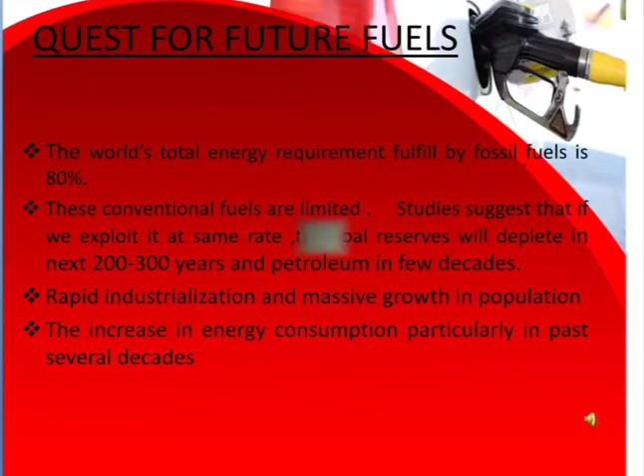Quest for future fuels means why future fuels are required. The world's total energy requirement fulfilled by fossil fuel is 80%, and studies show that if we exploit these at the same rate, they will deplete in the next 200 to 300 years, and petroleum in just a few decades. Due to rapid industrialization, massive growth in population, and increase in energy consumption, there are fears of exhausting natural resources. Solution: we should engage more in research and development of alternative fuels so that we may not face any scarcity of natural resources in the future.

Alternative fuels are materials or substances that can be used as fuel other than fossil fuel. These are also known as non-conventional fuels. Some alternatives to conventional fuels are hydrogen fuel cell, biofuel, natural gas, alcohol fuel, electricity, and other fuels.

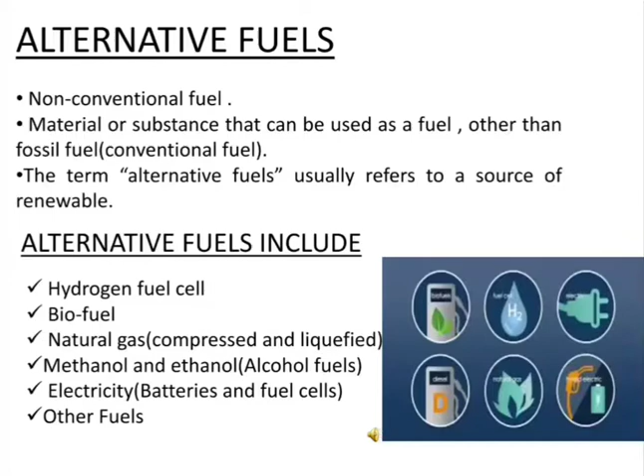Hydrogen is an emission-less fuel. The byproduct of hydrogen burning is water. It stores up to 3 times as much energy as conventional natural gas. When burned in an IC engine, nitrogen oxide and carbon monoxide are produced due to the use of engine lubricant. If we use hydrogen in a car, it would take comparatively less time to fill it up due to hydrogen fuel cell efficiency.

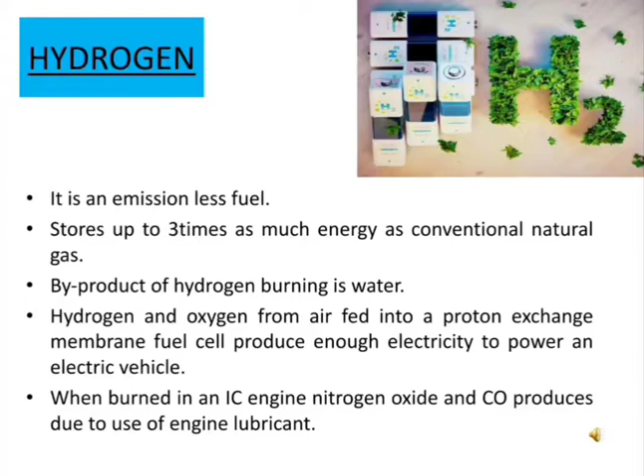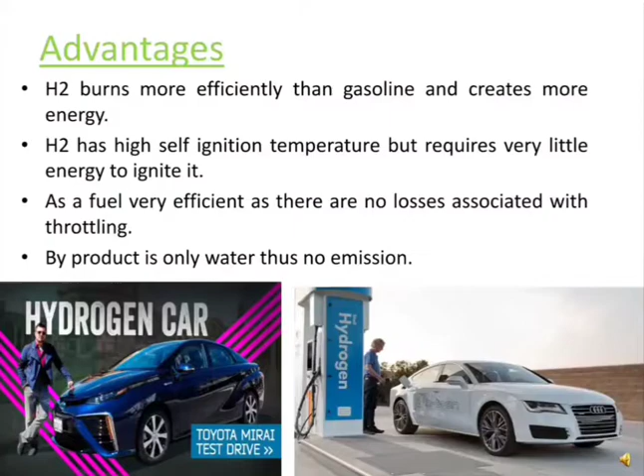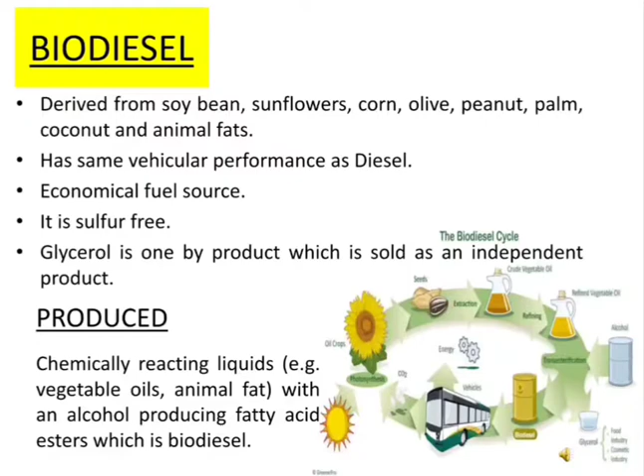Biodiesel is derived from bioproducts, for example soybean, sunflower, corn, etc. It has the same vehicular performance as diesel. It is an economical fuel source. It is free from sulfur. Glycerol is one byproduct which is sold as an independent product. This diagram represents the process of producing biodiesel.

Advantages: it is environmentally friendly. It can be used in any diesel engine with little or no modification. It helps lubricate the engine itself, decreasing engine wear and tear. It is safer than conventional diesel.

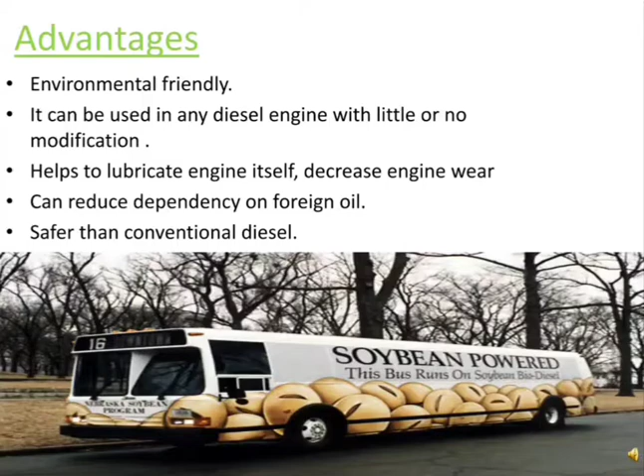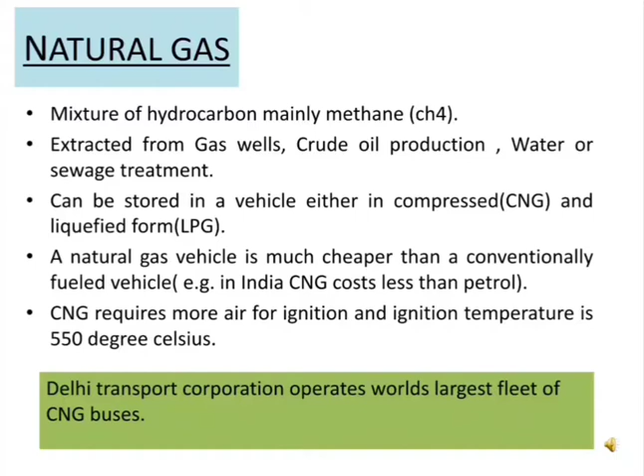Natural gas is a mixture of hydrocarbons extracted from gas wells, crude oil production, water or sewage treatment. It can be stored in a vehicle either in compressed or liquefied form. A natural gas vehicle is much cheaper than a conventionally fueled vehicle. For example, in India, CNG costs less than petrol. Delhi Transport Corporation operates the world's largest fleet of CNG buses.

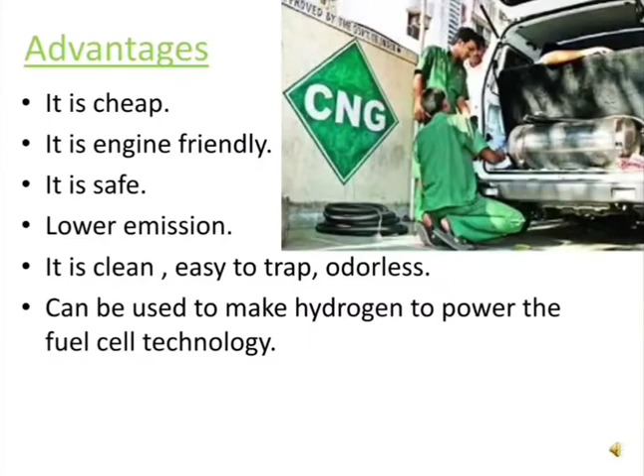Advantages: it is cheap, engine friendly, safe, lowers emissions, is clean, easy to trap, and odorless. It can be used to make hydrogen to power hydrogen fuel cell technology. These are some examples of CNG vehicles in India.

LPG is a byproduct produced when natural gas is processed and crude oil is refined. It is non-toxic, colorless and odorless. An odorant is typically added for detection purposes. LPG-run vehicles have lower emissions of reactive hydrocarbons, about 1/3 less, nitrogen oxide 20% less, and carbon monoxide 60% less than gasoline vehicles.

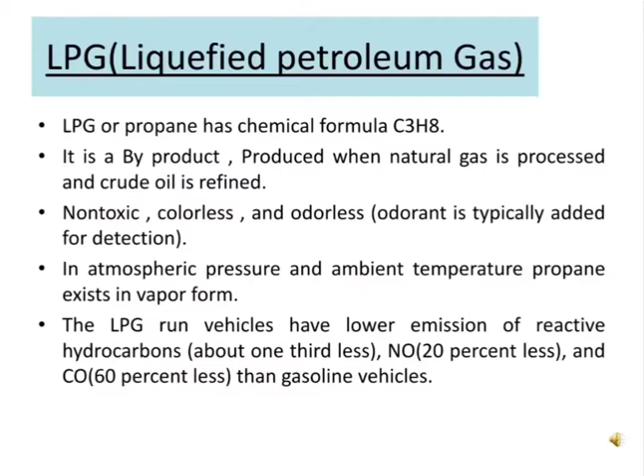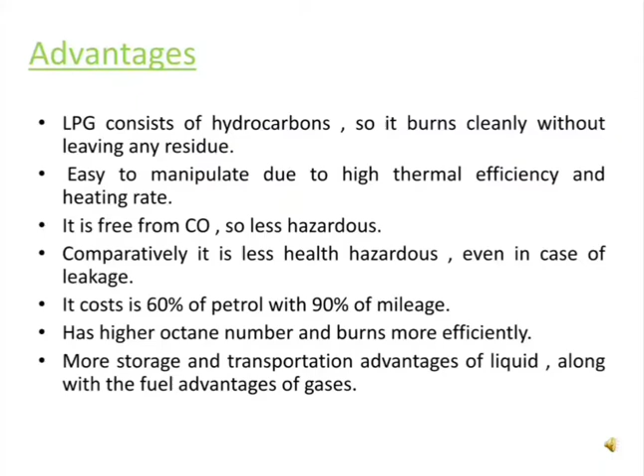Alcohol fuels: first, methanol. The primary alternative methanol fuel being used is M85, meaning 85% methanol and 15% gasoline. In the near future, M100 may be used. It is created from synthesis gas, hydrogen and carbon monoxide, in the presence of a catalyst. It can also be produced from non-petroleum feedstocks such as coal and biomass. Hydrocarbon emissions from M85 vehicles are slightly lower than gasoline vehicles, and smog forming is 38 to 50% lower than gasoline vehicles.

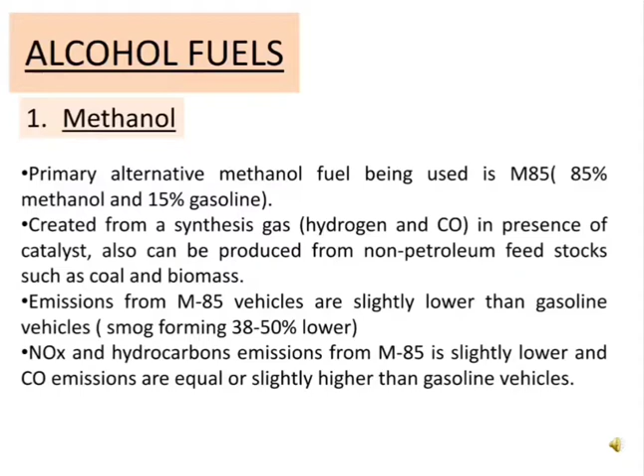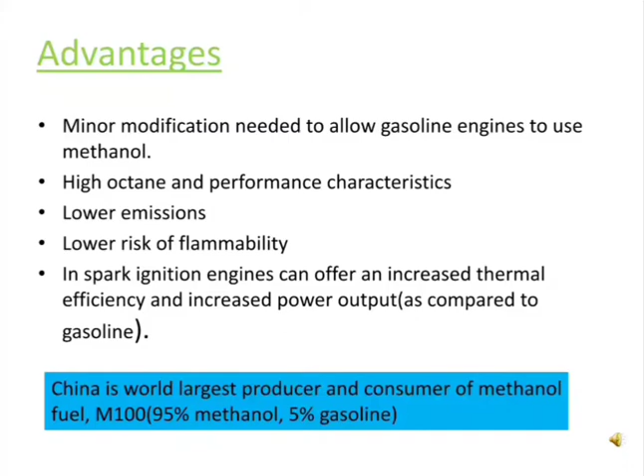Advantages: minor modification is needed to allow gasoline engines to use methanol. It offers high octane and performance characteristics, lower emissions, and lower risk of flammability. In SI engines, it can offer increased thermal efficiency and increased power output compared to gasoline. Presently, China is the world's largest producer and consumer of methanol fuel M100.

Ethanol is made by fermenting a variety of feedstocks such as sugarcane, potatoes, etc. Liquid ethanol can be used as a fuel blended with gasoline or in its original state. The first automobile on ethanol was built by Henry Ford in 1896. Compared to gasoline vehicles, it produces 30 to 50% less smog forming, and air toxins are reduced by 50%.

Advantages: it has higher latent heat of vaporization, higher flash point, no hazardous components, better output and efficiency, and higher compression operation of the engine. Brazil is the highest user of ethanol; 73% of cars, around 27 million cars, run on ethanol.

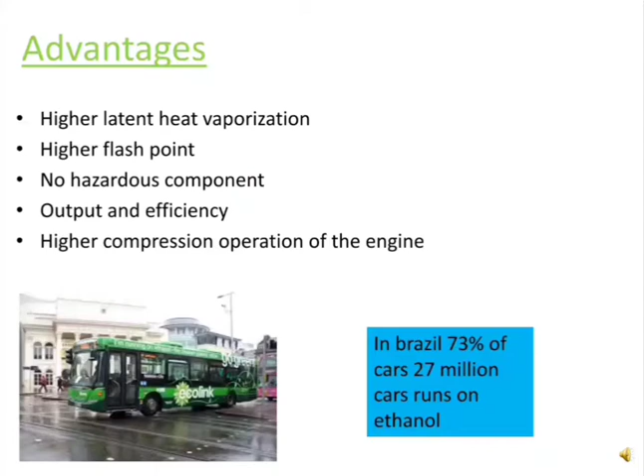Other possible fuels apart from this presentation are biomass, biogas, electricity, plastic fuel, and emulsified diesel fuel, etc.

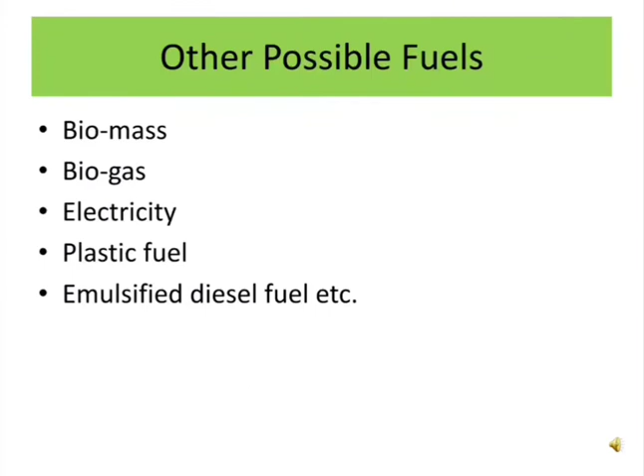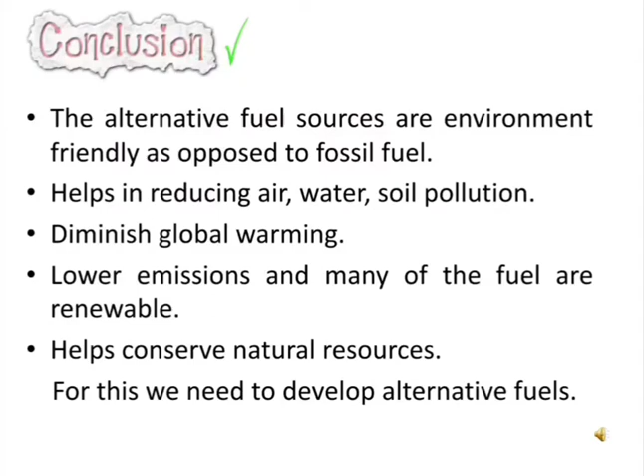Conclusion: alternative fuel sources are environmentally friendly as opposed to fossil fuel. They help reduce air, water and soil pollution. They diminish global warming, lower emissions, and many of the fuels are renewable, helping conserve natural resources. Thus, it is important to compare all types of fuels to determine the best one economically and environmentally, short term and long term. For this, we need to develop alternative fuel.